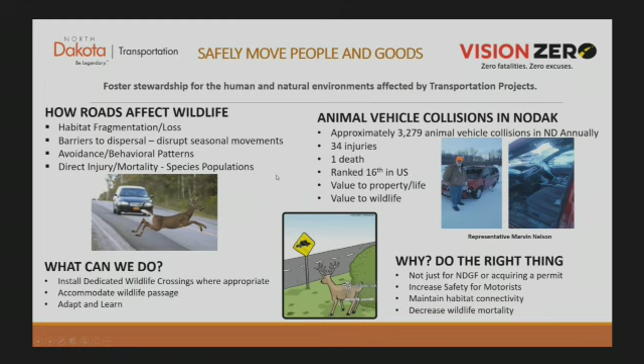So I just want to discuss the differences conceptually, what a wildlife crossing is versus what I call wildlife passage or accommodation. A dedicated wildlife crossing is really targeting a certain species or several species. A lot of work goes into the design and location of these types of features. And when we're talking about wildlife crossings, it's typically an overpass or underpass type structure.

And with this, there's what we call exclusionary fencing to help funnel wildlife to these crossings and also keep them off the roadway. And within the fencing, there are escape ramps or jump outs, where if an animal does get on the roadway side of the fencing, they have ways to get out. And then obviously gates, and wildlife guards on the roads that tie into the highway or interstates.

And it takes a great deal of collaboration and partnerships with state game and fish departments, and depending on where the project is, like Forest Service, for example, or Park Service, and just a lot of planning goes into these. And you don't just build them and walk away. There's monitoring associated with these crossings and maintenance to ensure the long-term functionality of the crossing, because they are a very large investment for DOTs to install these structures. And so we want to make sure they're designed appropriately and they work the way they're supposed to.

And so when we're talking about wildlife passage or accommodation, there's not necessarily target species. It's a really flexible design, especially when we're talking about a passage bench underneath the bridge. As you can see, there's a picture there, just a simple 3-foot wide path underneath the bridge will move a lot of different species of wildlife, because waterways function as natural travel corridors, so we'd rather see wildlife go under a bridge than over the roadway near the bridge. And there's other things like oversized culverts, or adding an additional cell that can be elevated to make sure it stays dry throughout the year. And then some of these larger bridge spans also function for wildlife crossings. They weren't necessarily designed for that aspect, but they do function as a wildlife crossing as well.

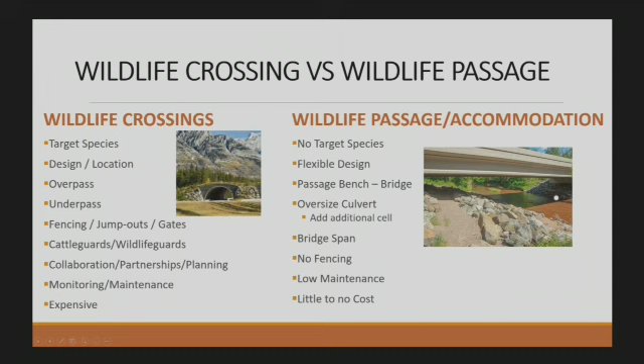So here's just some examples of overpass type structures. We don't have any in North Dakota, but when you're looking at installing these, you really don't want to over design or under design them, because they are very expensive. So you really have to find that sweet spot of how wide and how long they're going to be. Obviously, you don't want to spend too much money, but you don't want to invest a couple million dollars and find out it doesn't work either. So just a few examples.

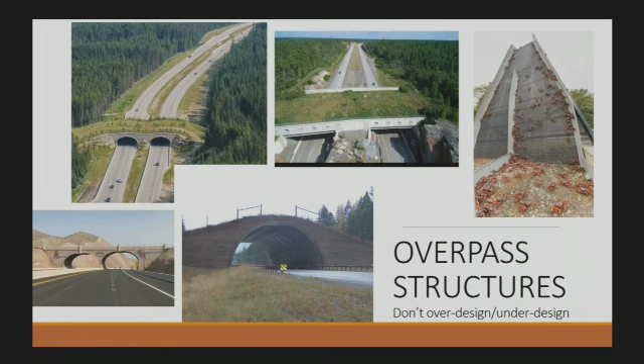These are underpass type structures, and we have 2 of these installed now in North Dakota. Especially for the ungulate species, deer and elk and bighorn sheep, the openness is really an important factor. So when an animal walks up to it, it's imperative that they're able to see through it well and want to be able to cross it. At the top left, there's a grizzly bear. They don't really care that it's a dark tunnel. They're a predator. They don't mind going through those types of structures, and that applies to other predators as well.

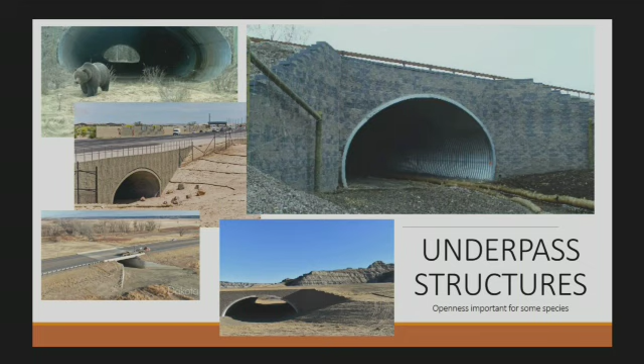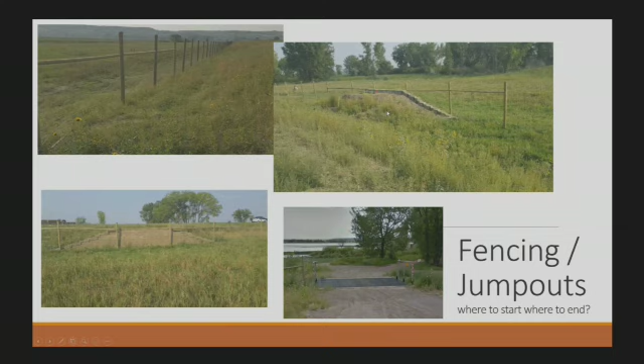And like I said earlier, there's exclusionary fencing associated with these structures. Typically, it's an 8-foot wire mesh fence that goes for some distance on each side of the structure, and it's always kind of a million-dollar question on where to start and where to end these things, and it just depends on the project and the location and the species. And then also jump outs associated with the fencing. So if an animal does get trapped on the highway side, they have opportunities to get out safely.

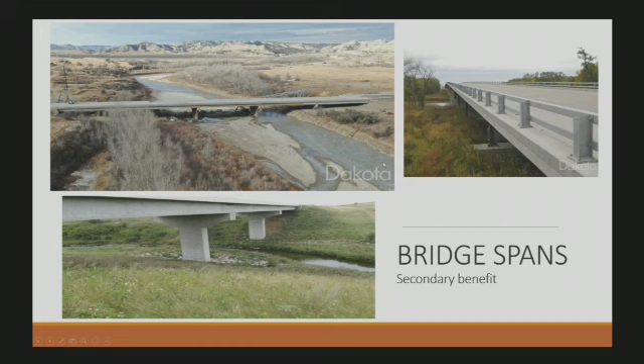And then these bridge spans, these are 3 bridges in North Dakota that function well as wildlife crossings. They weren't necessarily designed for that aspect, but the top left is the newly constructed Long X Bridge. You see nice long spans on each end there where wildlife can move underneath. On the top right is the Drayton Bridge that connects Minnesota and North Dakota over the Red River, also an excellent wildlife crossing. And the bottom left is the Jamestown Bypass, which also functions well as a wildlife crossing. And these don't have any fencing or anything associated with them.

So our first wildlife crossing we ever constructed was part of the environmental assessment for the Lewis and Clark Bridge replacement and the 4-laning, as part of a series of projects from Watford City to Williston. As you get closer to Williston on the river bottoms, it's the Lewis and Clark Wildlife Management Area. It's one of the largest WMAs in the state. It is owned by the Corps of Engineers and managed by the Game and Fish Department. It's excellent wildlife habitat. There's been a history of wildlife vehicle collisions and high traffic levels through this area.

And so, going from a 2-lane to a 4-lane, we wanted to maintain habitat connectivity in this area, particularly for moose and white-tailed deer and other species. But unfortunately, it's also a floodplain, right? So it floods frequently, some years worse than others.

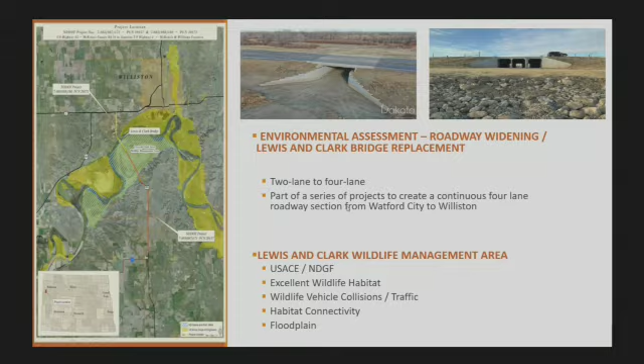So the crossing is designed specifically for moose. It's a 15-foot tall by 40-foot wide single-span pre-stressed box beam bridge. It's approximately 86-foot wide across the roadway. And as you can see, that top left, it really has a good openness feel to it. You look through it, you can see daylight on the other side. So I think that it was designed appropriately.

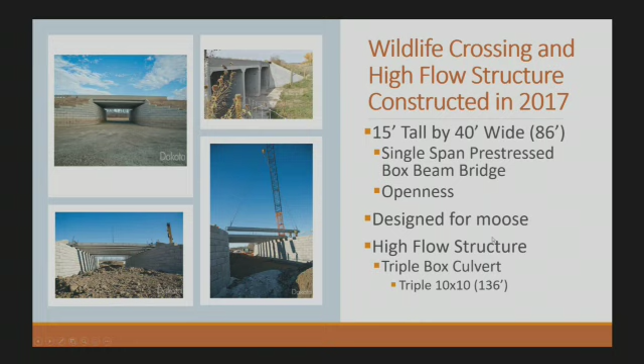And then we also designed a high flow structure, which was mainly meant to move water during high flow periods, but also was meant to function as a wildlife crossing during drier periods. And this is just a triple box culvert, 10 by 10. Each cell is 10 foot by 10 foot. And it's a little bit longer. It's 136 foot long. So right away, we had these constructed in 2017.

We had early signs of use. There's raccoons, coyotes, deer, turkey, moose. The moose right away, they weren't too keen on it. They would walk up to it and turn around. So we didn't get any actual moose crossings, like going through the structure, but they would walk up to it. I think one even made it halfway through and turned around and came out. So this was our first wildlife crossing. It was exciting, but that kind of ended abruptly, and the dream soon became a nightmare.

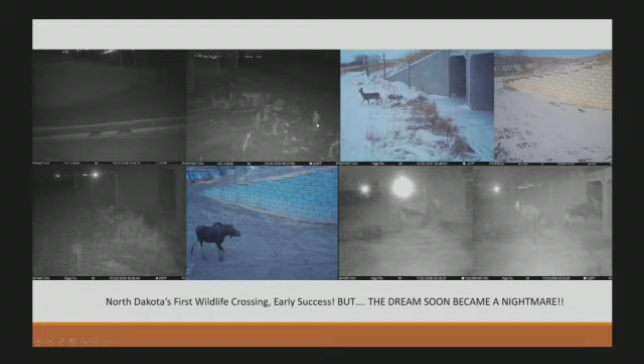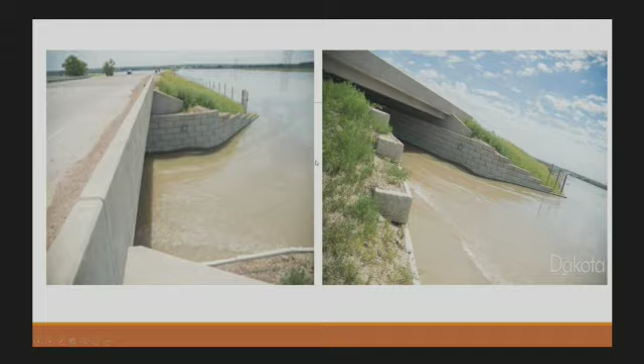So we had 2 years of pretty heavy flood events in the river bottom area near Williston. This is exactly what you don't want to see at a wildlife crossing, but I can't really predict what nature is going to do. And so we had 2 years of pretty high flow going through the structure, which caused quite a bit of scouring on the outlet side. And so here's the video. Hopefully it plays okay. Just kind of showing what was happening as the water kind of comes through the structure.

North Dakota is not known for whitewater rafting, but this is probably as close as we can get. Probably would have been pretty fun to ride a raft through this.

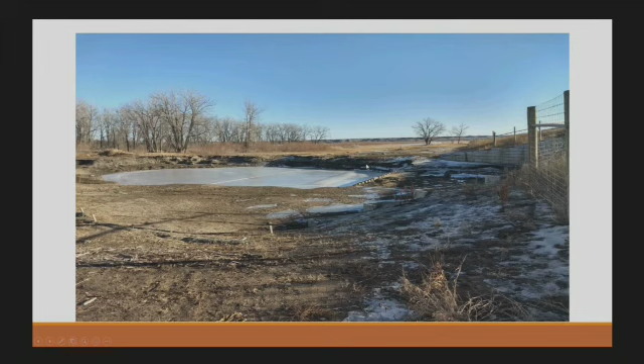So as you can imagine, as this kind of occurs, long period of time, it created a very large scour hole. Here's a picture, and this is, I believe, after the first year of a major flood event. It's pretty big. You can see part of the sheet piling as part of the structure integrity sticking out there a little bit. The second picture obviously got a lot bigger the second year, so we actually had to do a temporary repair just to help protect that sheet piling. So we dumped some riprap on just to kind of ensure that was going to stay in place.

And rumor has it, this became a popular fishing destination. So I had to sneak up there one day, and lo and behold, I found Bill Gathman from our Williston district fishing on his lunch break. And he told me not to tell anybody about the fishing spot, but now it's gone. So I guess the secret is out.

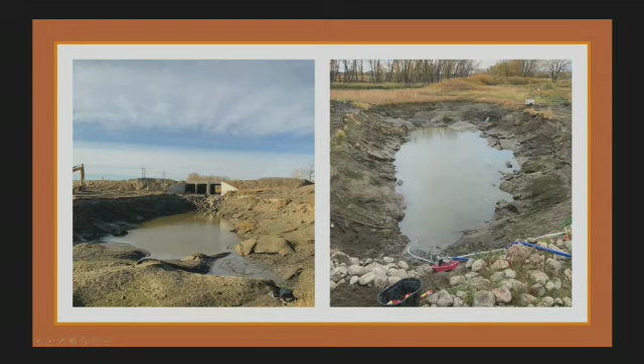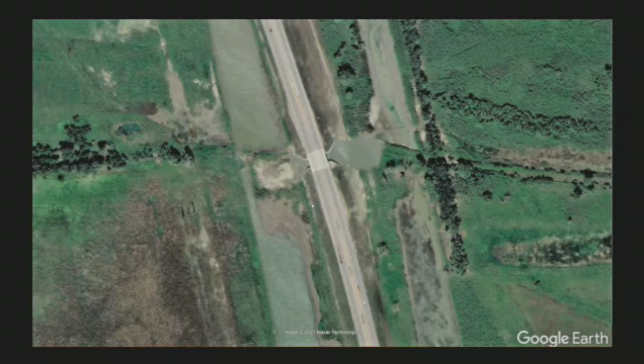This is the scouring that occurred through the high flow structure. Again, not good. It created quite a big scour hole, pretty deep. So we repaired that as well. That's just some Google Earth imagery showing this is the wildlife crossing here. You can see the outline of the scour. This is the high flow structure, another large scour.

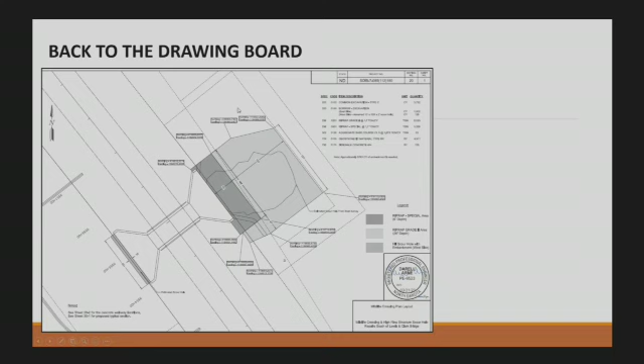So we had to kind of go back to the drawing board. We wanted to obviously fix the scour hole, but we also wanted to do a little bit of a longer term fix to ensure functionality of the wildlife crossing and also protect the integrity of the structure and the roadway. So we brought in our resident wildlife crossing expert, Darell, the designer. We asked him, Darell, can we fix this? And he, without hesitation, said, yes, we can.

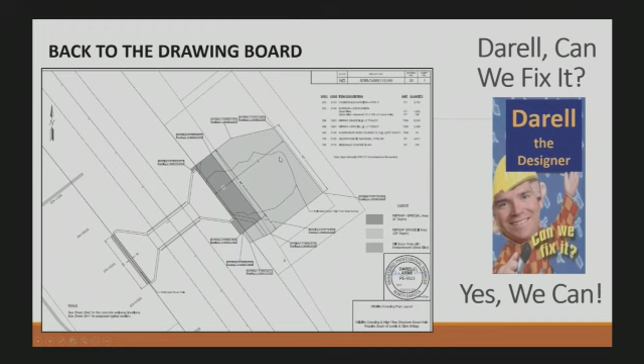So we ended up placing a lot of riprap within the scour hole, kind of patching that back up with earth, and that happened on both the wildlife crossing and the high flow structure. And then also installing a ditch block or a berm on the inlet side of the wildlife crossing. And this was meant to help as we get these high water events, that it's hopefully not going to overtop the berm and keep water from going through the structure and creating that scouring.

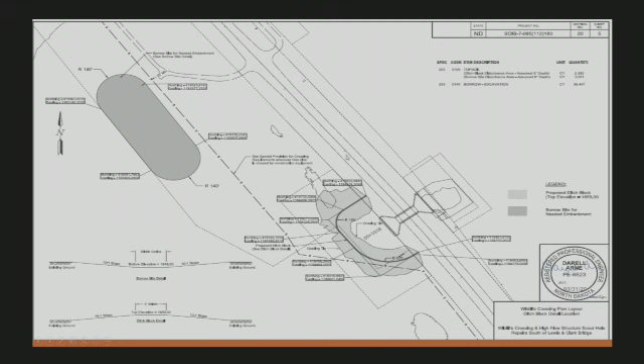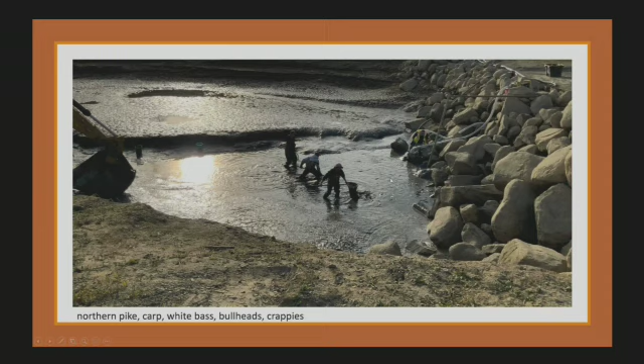So as we were working on this project and lowering the water to start the repairs, it was actually full of fish. You can hear some Game and Fish staff kind of netting them out there so they can get them back in the river. Some of the species in there: northern pike, carp, white bass, bullheads, crappies. Picture showing them, getting them out of there.

And here is the ditch block. It was designed at a height that we didn't want it to be too high, so that wildlife didn't want to use the crossing, and we also wanted to have it high enough to prevent those high water events from going through the structure.

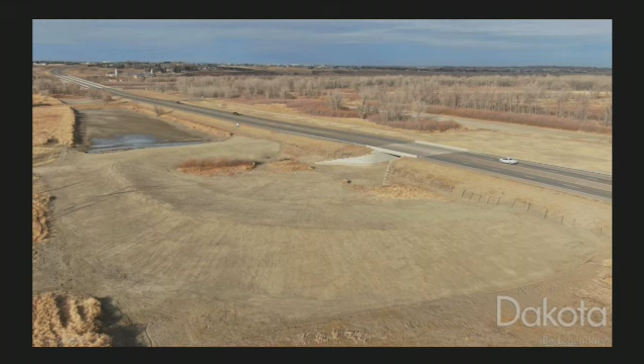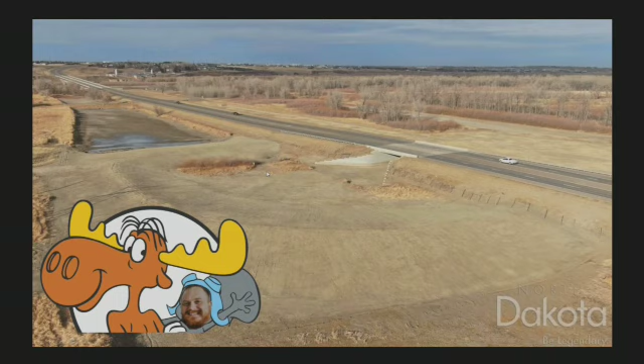And since I picked on Bill and Darell a little bit, Bullwinkle and I approve this project. We think it's going to work and help the crossing be functional, which we want it to be. And now our Minot district came down with a drone and took some footage of the repair work, and so I'll play that for you guys.

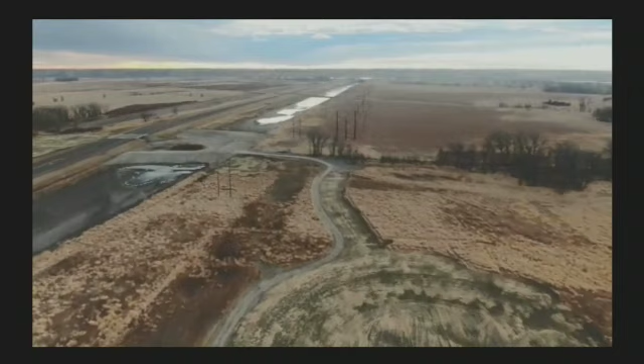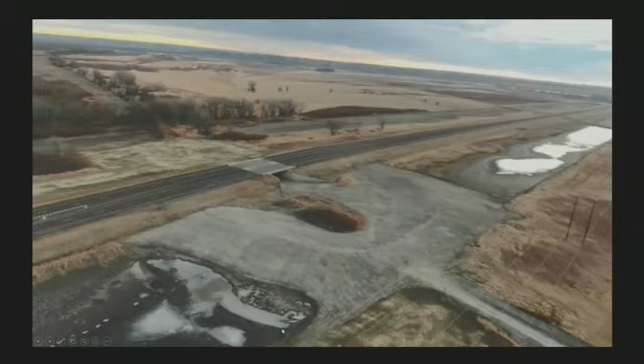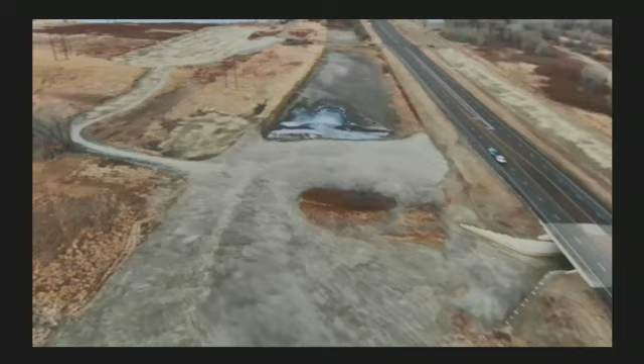You see the ditch block there, the wildlife crossing. Scour holes nice and patched up. Kind of shows it's really excellent.

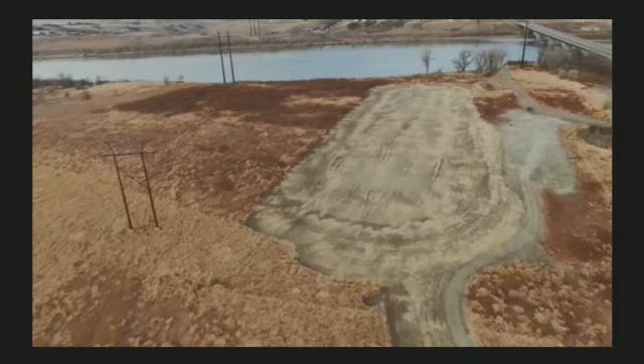Just for the sake of time, I'll end the video, but that shows the repair work pretty good. We hope it's going to work and get our crossing functional again. Oops.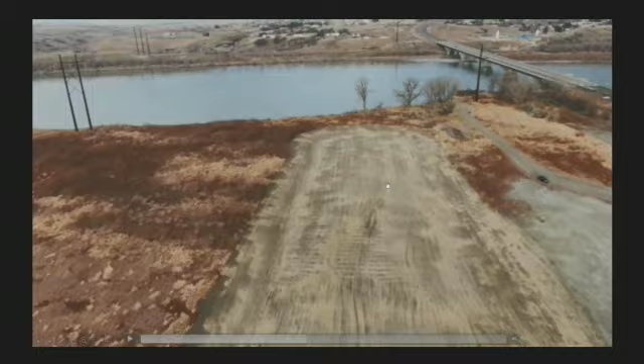Okay, so we did the repair work, and Game and Fish got their cameras back up, and we already have some success. Moose have actually used both the high flow and the wildlife crossing, so that's exciting to see. And it's really kind of a one of a kind situation. I don't think there's another wildlife crossing in the world that has to deal with flooding issues like this one.

Next, I'll talk about our other crossing that has recently been constructed. I'm not going to go into a lot of detail because we talked about this quite a bit last week, but this one was designed specific for bighorn sheep. It was part of the Highway 85 project from Belfield to Watford City. It's a precast.

Hey, Greg, can you share your content again? Yep. Okay, come back up. Yes. Okay. All right. Yep.

So this is the Belfield to Watford City project. We installed an underpass type structure specifically for bighorn sheep. Fencing we haven't installed yet. It's going to be installed later this year. A second underpass structure is going to be installed at a future date, approximately 2 miles south of the existing structure. And essentially the whole Badlands stretch will have the exclusionary fencing.

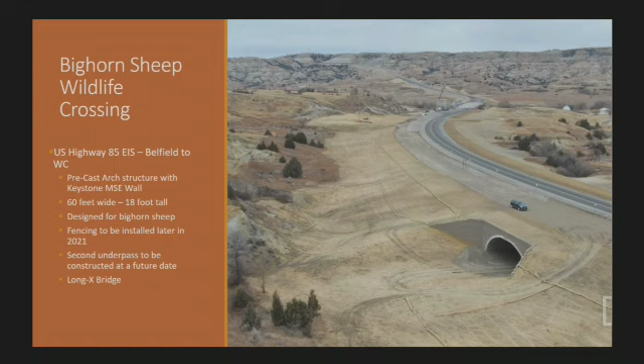Long X Bridge will function as a wildlife crossing, and then the bighorn sheep underpass, and then further to the south there'll be another underpass, and that's more geared towards mule deer and other species. The bighorn don't quite go down that far, but so it'll be a series of 3 wildlife crossings. Just a few pictures. You've seen quite a few last week.

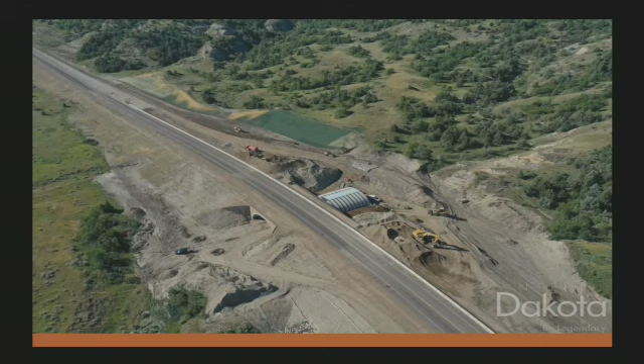Game and Fish has a temporary camera up right now. As we get the fencing installed, they'll be putting some better equipment up. But we've already had mule deer use the structure, so that's exciting, especially since there's no fencing or anything installed yet.

So now I want to jump in and talk about accommodating wildlife and wildlife passage bench design, and we're talking about installing a path underneath a bridge structure, and the purpose of this is to increase roadway safety by trying to keep animals underneath the roadway rather than having them go over. It provides a safe footing for bridge inspection and maintenance activities.

And it's very cheap to install and doesn't take a whole lot of design effort to get that in there. It's essentially just a flat spot, a minimum of 3 feet is recommended. Obviously it can be wider, and it just kind of depends on the structure and the river channel or creek channel on where that bench is going to be placed, and also the piers of the bridge.

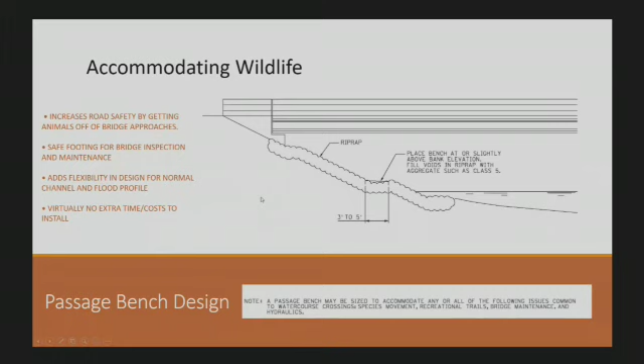So just a few examples, and then this bench is built, and then you want to put some sort of either aggregate or a topsoil to kind of make that path walkable. Class 5 aggregate is recommended, but that bottom middle picture is quite a bit bigger, but it functions well still. And that bottom right is what we don't want to see.

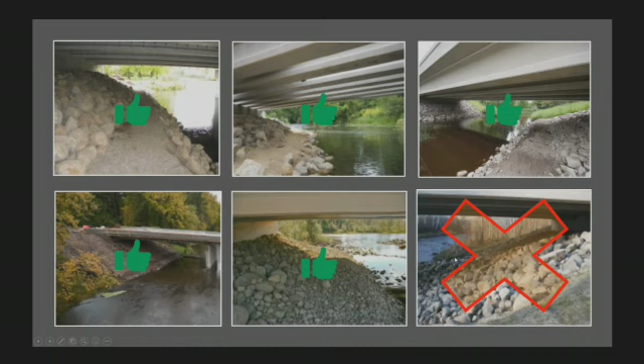That's basically a barrier for wildlife movement. And although riprap is great for protecting a structure, if we can get a path in there, try to keep animals off the roadway, and that's what we're looking for. We've done this on a few bridges.

The first one we've done was just south of Pembina on Interstate 29. This is just kind of a panoramic view showing the path on each side of the river here. I believe this was installed 2017. So almost immediately we had this path constructed.

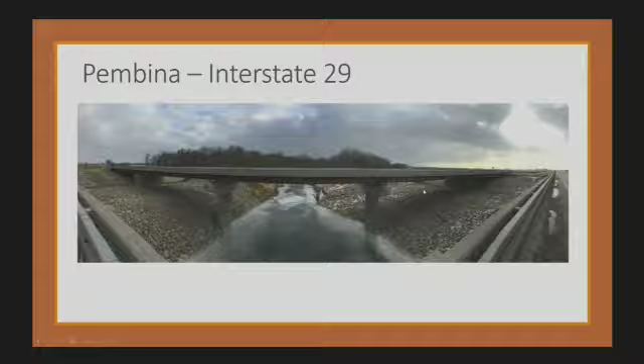We had wildlife using it, turkeys, deer, geese, moose, skunk, raccoon, rabbit, and we even caught footage of the great American mulchman, very, very rare species, but we got them. And the old saying from the Kevin Costner movie, if you build it, they will come, holds true.

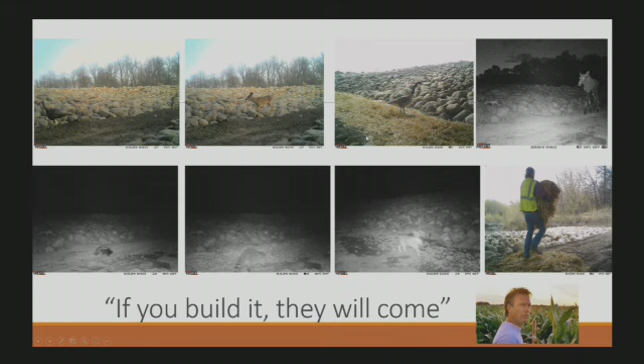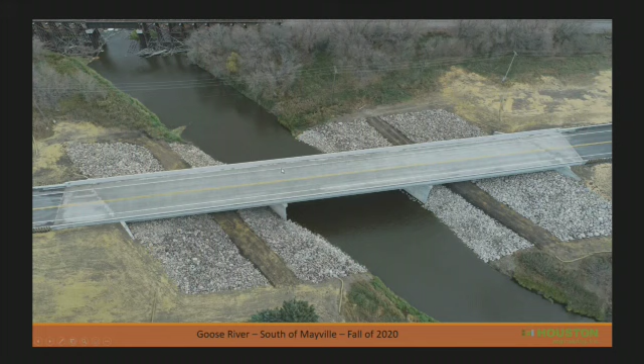Just a few more pictures. Just want to thank Houston Engineering for taking some photos and sending them to me.

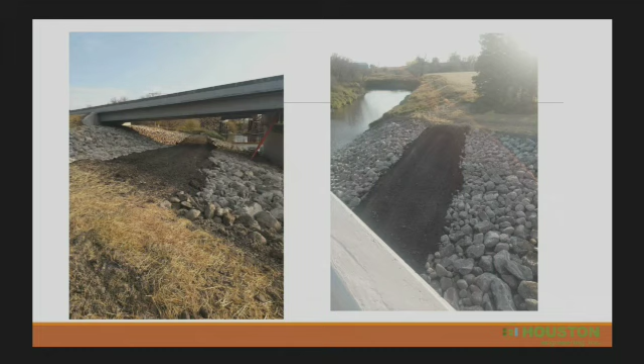Shows the path kind of extending, and you want the path to extend all the way across the riprap. So this one was constructed pretty well. And just other options, obviously the wildlife bench like I've been talking about, but Minnesota DOT has been going back through some areas where they don't have a bench installed, and they've been just surfacing the riprap with aggregate, and it works really well for wildlife passage.

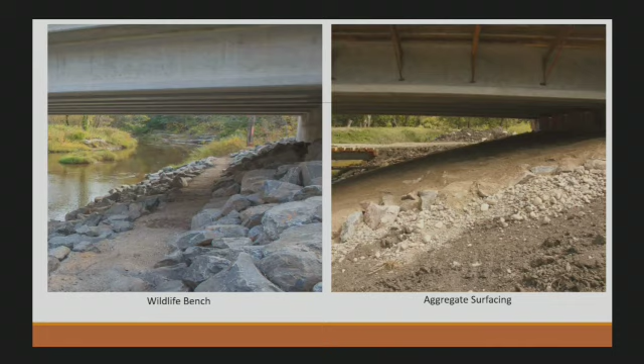Other options we can look at: obviously there's a reason why we install box culverts sometimes. They're a lot cheaper. There's less maintenance associated with them, but they're not always the best for aquatic and wildlife passage. And so other things we can look at is adding additional cells, like the bottom left. During lower flow or low water times throughout the year, they can be used for wildlife passage, and then just oversizing a culvert can work as well.

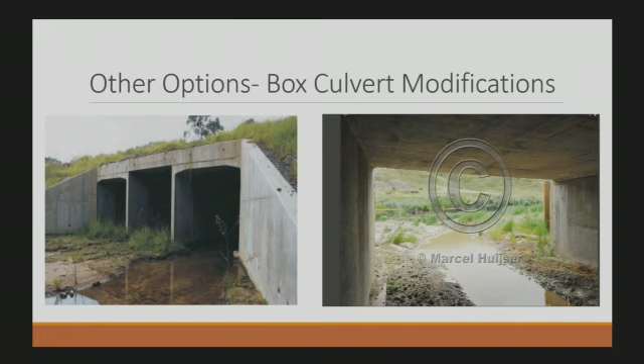So I just want to wrap up the conclusion. Our overall goal is to do the right thing, and that is to increase safety for motorists, improve and maintain habitat connectivity, and reduce mortality to wildlife. As I mentioned, we're never going to completely eliminate the animal vehicle collisions, but we can implement dedicated wildlife crossings where it's appropriate, maintain and monitor them, and make changes as necessary. And work towards installing passage benches more frequently and becoming a standard practice where it makes sense. Explore other options for box culverts.

And what does the future hold? I don't know. As technology increases, especially in vehicles, maybe they're going to be able to detect wildlife moving from a distance and stop your vehicle in time. So maybe Elon Musk can work on that for us.

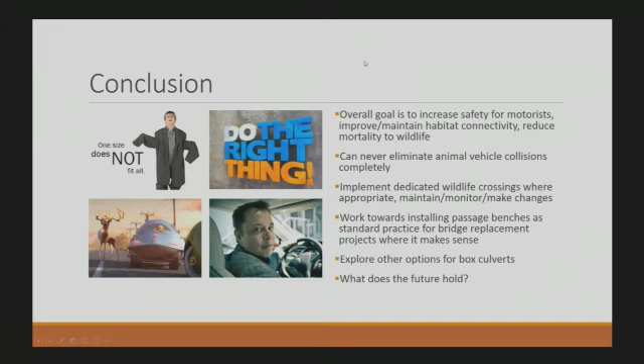One, I think you touched on, but have any moose made it through the crossing yet? Yes, as I saw the pictures there, we're getting them on both structures actually. Moose are going through. I haven't seen any recently, but Game and Fish is keeping track of the monitoring for us and sending pictures as they come in.

That was going to be my follow-up too: what is the plan for monitoring the effectiveness of those dedicated crossings? So that's all part of working with the Game and Fish Department, part of the maintenance too, but monitoring. So we develop MOUs with them, and they are going to monitor the structures for us and provide a report on the effectiveness, and so they're handling that, and we work with them as issues arise and if we need to make any changes.

Sure. Another question that came in is, how do you protect the wildlife crossing from being washed away during high flow events? And I got a feeling this is maybe referring to the passages and the benches that you were going through towards the end. Yep. So it's not perfect, right? As you get high water events, it's probably going to wash some of that away, but also over time, it's going to fill back in with natural sediment as sediment transports through the bridge structure. So there may be some maintenance if we've got to get some dirt put back in, but ideally, over time, it's going to fill back in on its own. Sure. And I think using some of that larger aggregate too would help rather than just dirt. Oh yeah, you bet.